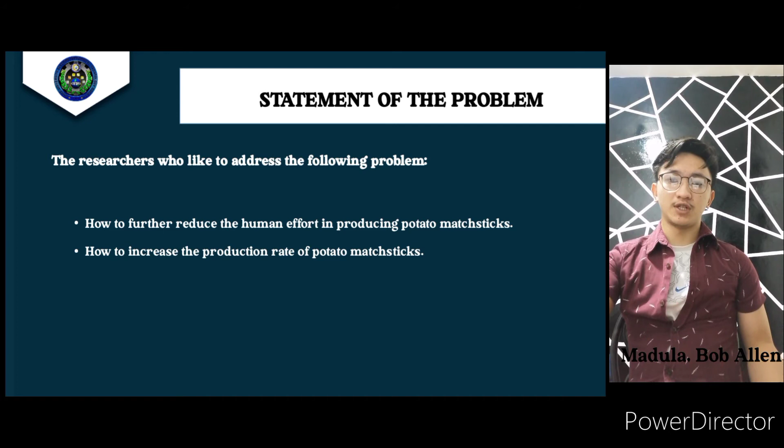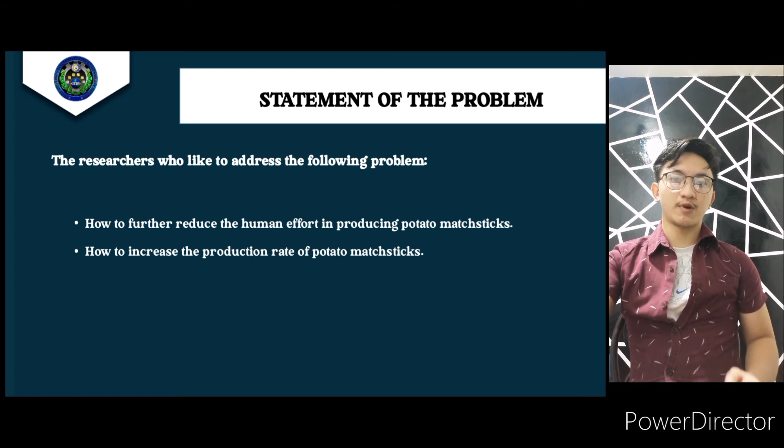Statement of the problem: In producing potato matchsticks, most producers use a semi-automatic potato cutting machine to lessen the burden of the workers from using a manual slicing machine, which is laborious and causes low production rate. However, using the semi-automatic potato cutting machine still involves human effort in doing many tasks and still leads to low productivity. Hence, the researchers will fabricate a machine that will reduce the inconvenience of the worker and improve the productivity of the machine in producing potato matchsticks.

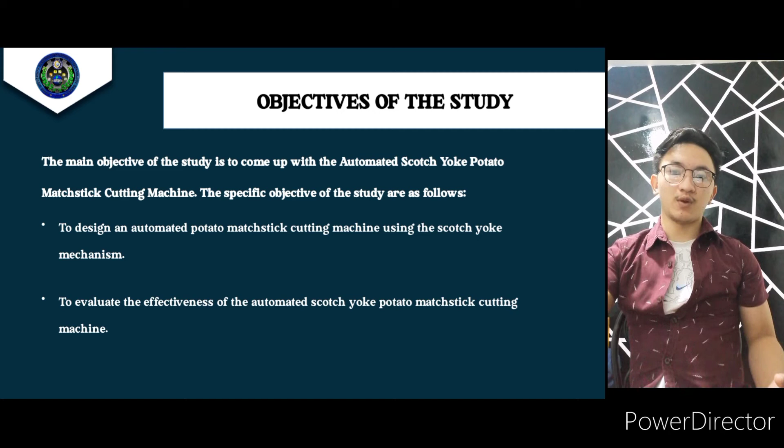Objectives of the study: the study's major goal is to develop an automated Scotch Yoke potato matchstick cutting machine, and the following are the study's particular goals: to design an automated potato matchstick cutting machine using the Scotch Yoke mechanism, and to evaluate the effectiveness of the automated Scotch Yoke potato matchstick cutting machine.

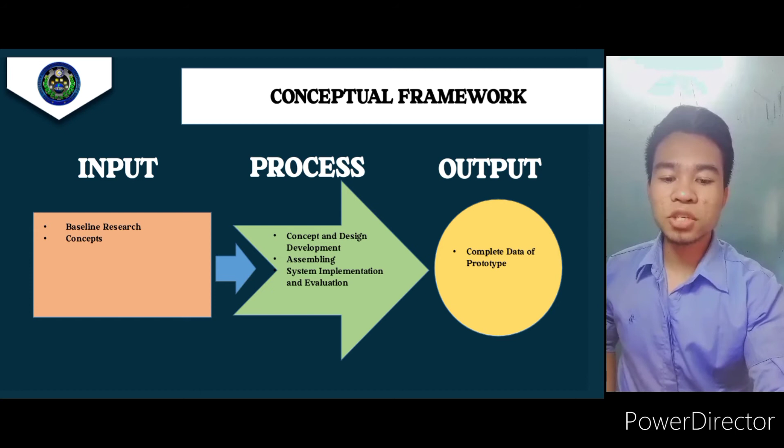Scope and limitation: The shape of the potato will be treated as irregular with an approximate thickness and width of 3 inches and length that is limited from 3 inches to 3.5 inches. The evaluation will be determined by its capacity in terms of kilogram per hour of potato matchsticks that will be produced.

Major components of the machine include a single phase induction motor, speed reducer, chain and sprockets, Scotch Yoke body parts consisting of 2 connecting rods, 2 push blocks, foundation and supports, and a circular disc with a cam follower connected to the cam which dwells at both sides, grid blades, feeding assembly, metallic sheet, and a frame.

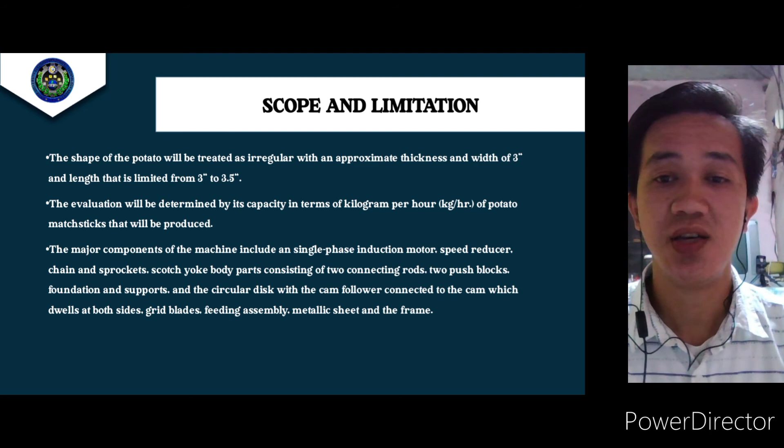Definition of terms. Automation: a wide range of technology in which human effort is reduced. HP: a unit of measurement of power or the rate at which work is done, usually in reference to the output of engines or motors. Mechatronics: a branch of engineering that focuses on designing, manufacturing, and maintaining products that have both mechanical and electronic components.

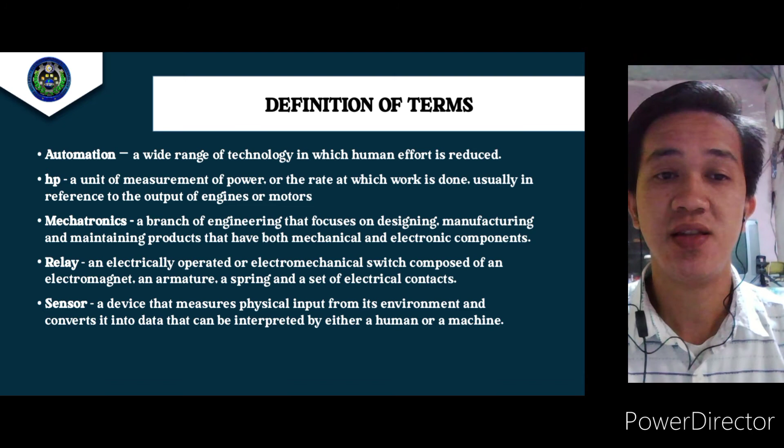Relay: an electrically operated or electromechanical switch composed of an electromagnet, an armature, a spring, and a set of electrical contacts. Sensor: a device that measures physical input from its environment and converts it into data that can be interpreted by either a human or a machine.

For our topic, we have gathered 5 published works of literature for our related studies. Faiz and his companions designed a semi-automatic French fries cutter, which is much cheaper. The cutter of the motor is designed by implementing the concept of crank rotation with a pusher to push the potato to the cutting blade.

A potato peeler is located on top of the machine and rotated by an AC electric motor.

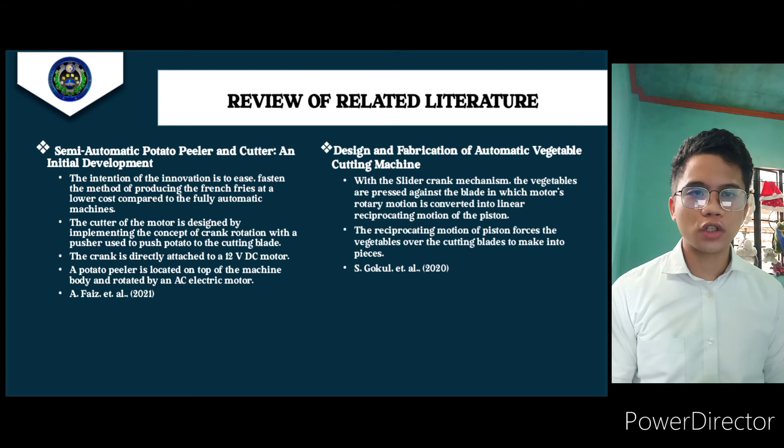An automatic machine was fabricated by Gokul and his companions in 2020. The machine has a slider crank mechanism which presses the vegetables against the blade, in which the motor's rotary motion is converted into linear reciprocating motion of the piston.

A design of an automatic potato slicing machine was done by Lat and Tho, where the slicing wheel is mounted on the shaft rotating by an electric motor with a power of 1.1 kilowatts. During their testing, they were able to produce 4.3 kg per minute of potato slices in just 5 seconds, with a recorded efficiency of over 88%.

As for Kingsley Omoyibo, he designed a potato slicing machine with a 5 horsepower motor at Igbinedion University Okada. The machine he designed was able to produce a damage efficiency of 4.8%, while the slicing efficiency was 95.18%.

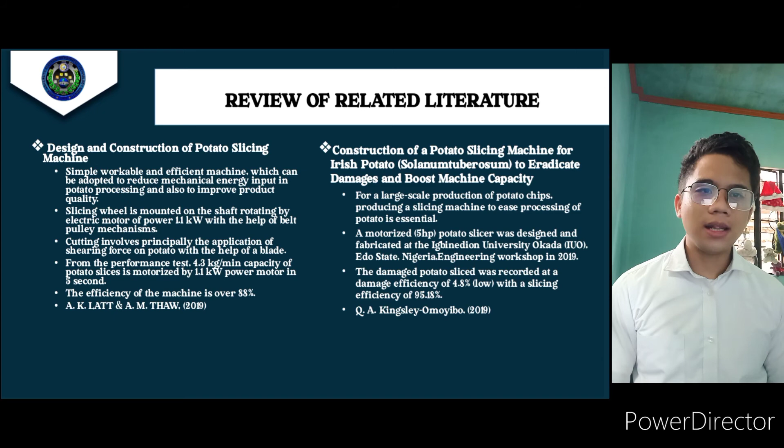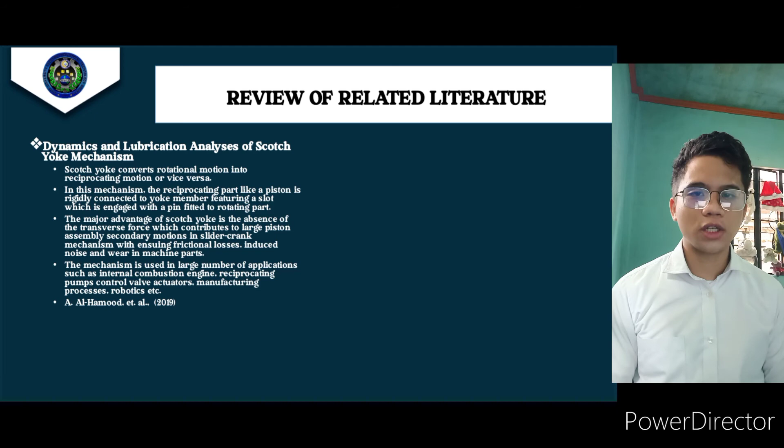Methodology. The purpose of this study is to present underlying effective methods to be used as a means and aid for the success of the study, as well as the procedures and techniques that underpin the realization of the study's objectives. The methodological framework is the section of the study wherein it shows the steps that the researchers have to follow in the process.

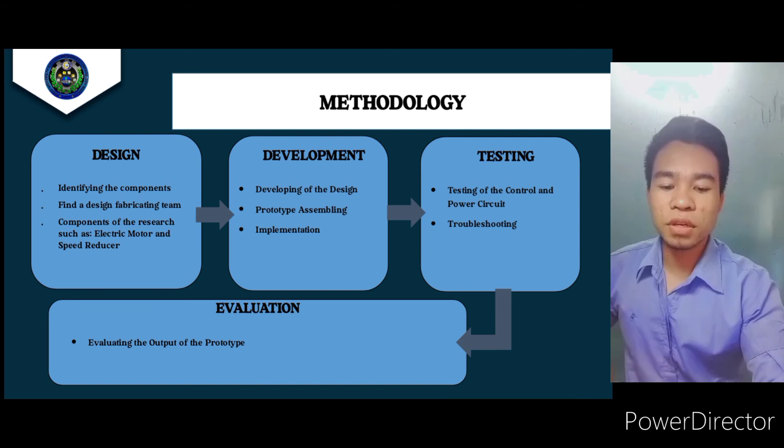The first process is the design: identifying the components, forming the design and fabricating team, and components of the research such as the electric motor and speed reducer. For the development process: developing the design, prototype assembling, and implementation. For testing and troubleshooting: testing of the control and power circuit, and troubleshooting. The last process is evaluation: evaluating the output of the prototype.

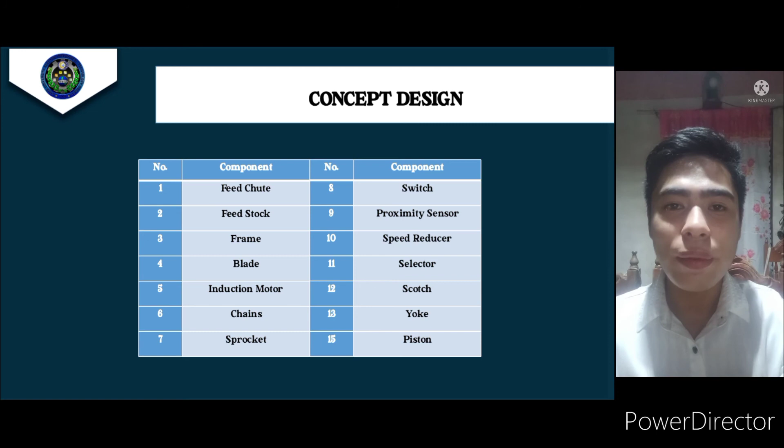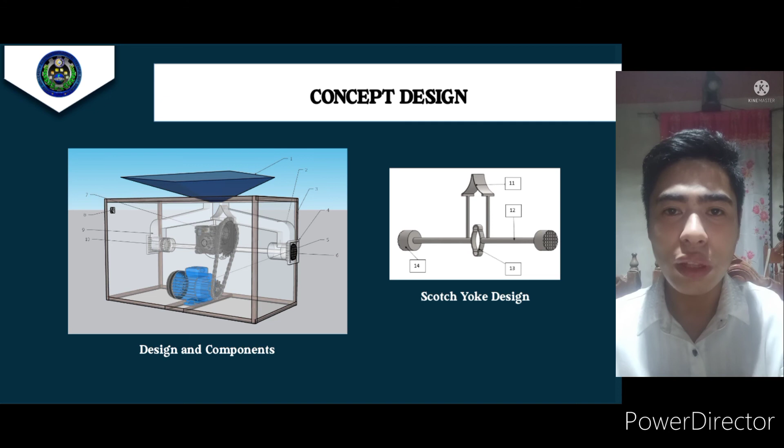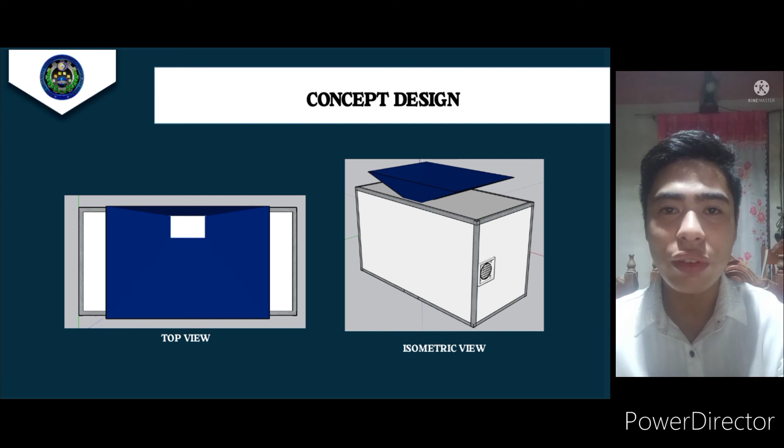Design and components. Induction motor: the component responsible for the movement of the Scotch Yoke mechanism. Scotch Yoke: the mechanism for processing the potato. Through the rotation of the motor delivered to the yoke, both scotches alternately press the potatoes into the blades on both sides, reducing the potato into matchsticks.

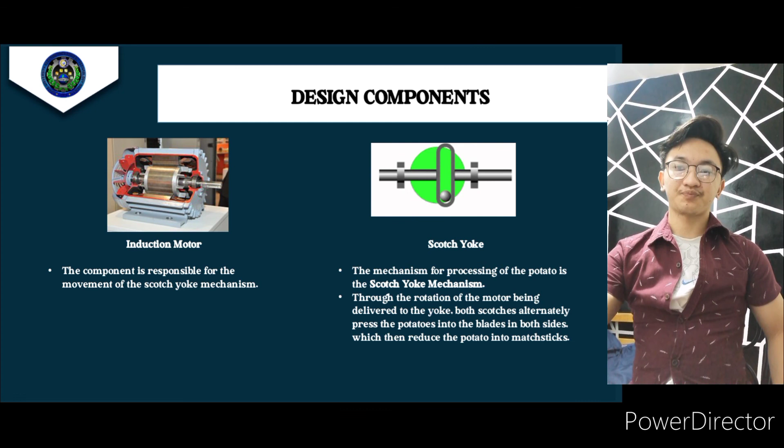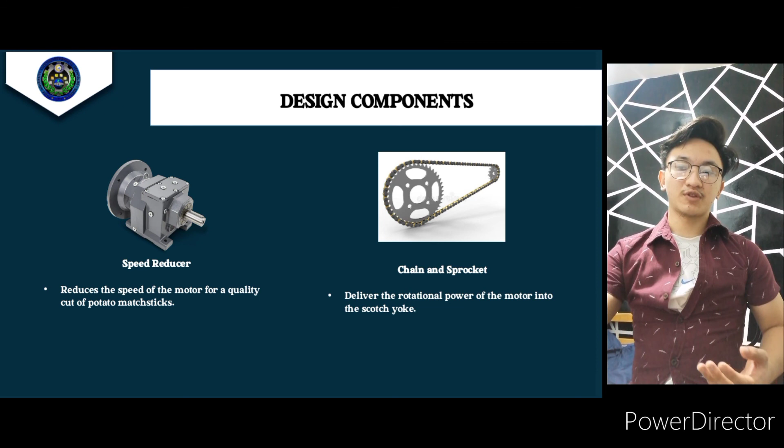The speed reducer reduces the speed of the motor for a quality cut of potato matchsticks. The chain and sprocket deliver the rotational power of the motor into the Scotch Yoke. The capacitive proximity sensor serves as a switch, where the motor will only run if the sensor detects the presence of a potato.

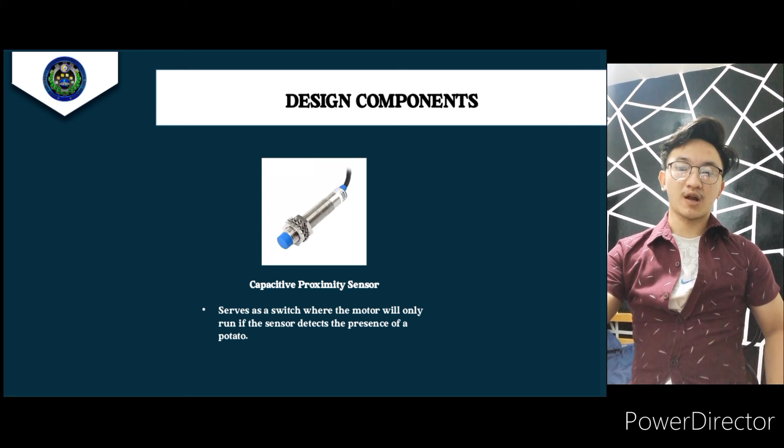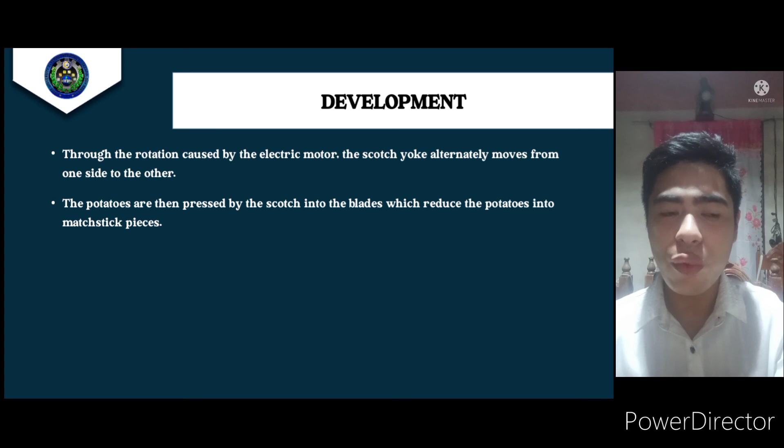Development. Through the rotation caused by the electric motor, the Scotch Yoke alternately moves from one side to the other. The potatoes are then pressed by the Scotch into the blades, which reduce the potatoes into matchstick pieces.

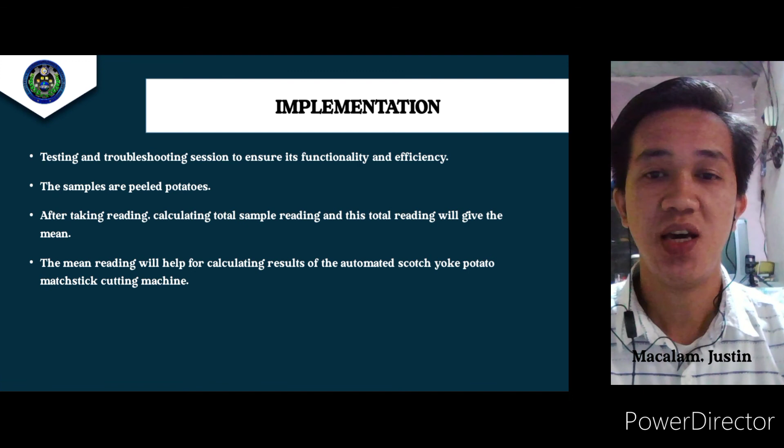Implementation. A testing and troubleshooting session was conducted to ensure the functionality and efficiency of the machine. The samples are peeled potatoes. After taking readings, the total sample reading is calculated and its total gives the mean. The mean reading will help in calculating the results of the automated Scotch Yoke potato matchstick cutting machine.